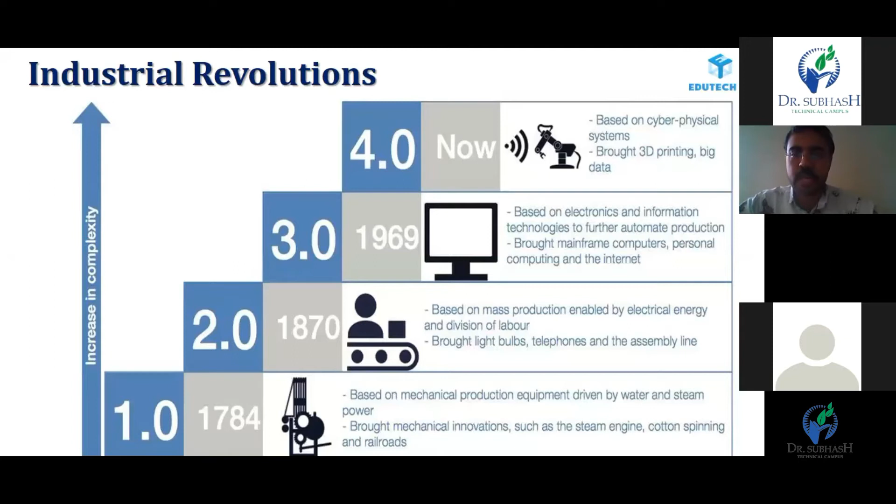So in the third revolution we faced these kinds of inventions, and currently we are in the fourth industrial revolution. It is basically the combination of earlier inventions, and the internet has lessened the distance between these manufacturing systems. Robotics, the internet of things, big data analysis, augmented reality, virtual reality, 3D printing, these kinds of cyber physical systems have grown up, and we are now in the fourth industrial revolution, known as Industry 4.0. So 3D printing is a technology we are using in Industry 4.0.

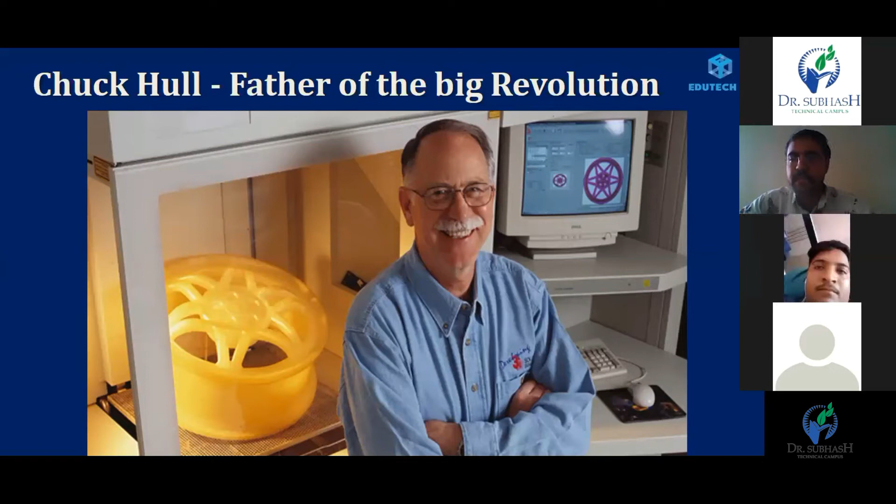This image is of the father of the revolution, Chuck Hull, who invented 3D printing for rapid prototyping in the 1980s. Initially he invented the stereolithography apparatus, which was based on the vat photopolymerization technique, and after that many different processes started to grow up. He patented it and established a company known as 3D Systems, which today is a very big company in the 3D printing sector.

There are 6 phases of 3D printing, starting from the 3D CAD model to the entire 3D printed object. First and foremost, we need software in which we can make our CAD model, and after making that CAD model, it has to be converted into a particular file format, known as the .stl file. In other terms, it is also known as the stereolithography or 3D printing file.

After making that file, your 3D printer is not able to understand what data the .stl file contains, so it has to be converted into a machine readable format, which we use to run CNC machines, that is the G-code file. So the .stl file needs to be converted into a G-code file. For that we require software known as slicing software.

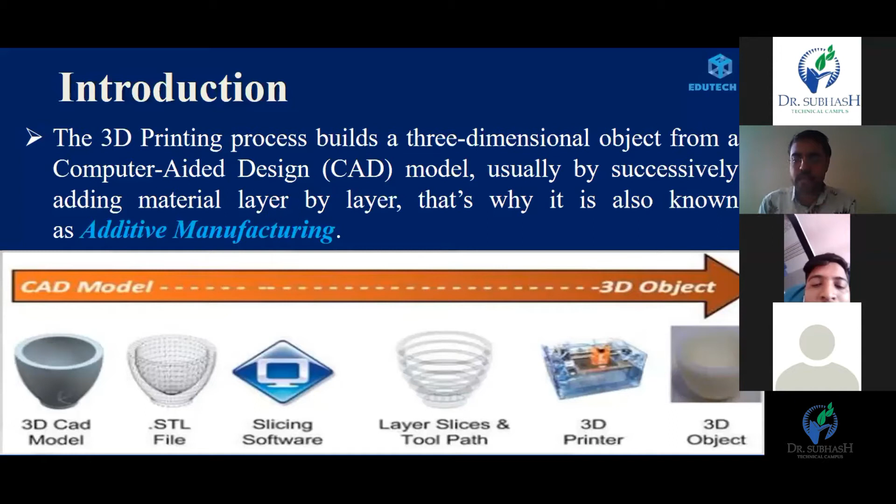After considering hardware, you have to acquire software knowledge for running a 3D printer, for modeling a 3D model, and for converting that 3D model into machine readable format, that is G-code. For the entire thing, you have to consider many kinds of software. So software makes up a very good proportion of the 3D printing ecosystem.

Next comes the material. Till now, we have developed more than 100 materials of different types. For example, thermoplastics, polymers, composites, metals, alloys, rubber, elastomers. Many kinds of materials are available which can be used with certain kinds of 3D printers. So we have enough material today to deal with 3D printing, and new materials are being introduced day by day as material science progresses.

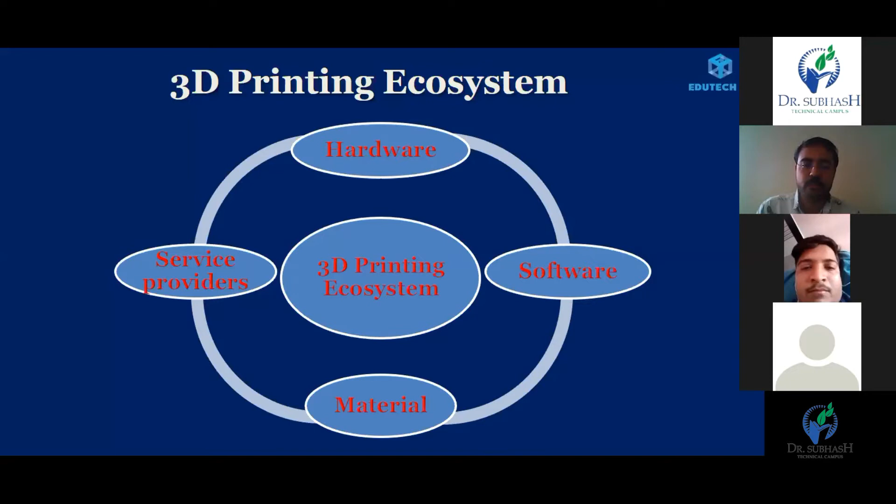And the fourth pillar of the 3D printing ecosystem is service providers, combining the three earlier stages, meaning those who deal with the hardware, software, and material, and provide services such as procurement of material, procurement of hardware, and development of software. These services are provided by the service providers, and they are taking 3D printing to the end users in the community. 3D printing educationalists and 3D printing teachers are also providing services in the 3D printing ecosystem.

Now, going into 3D printing, or you can say the additive manufacturing technologies, there are majorly 5 types of technologies available till now, starting from vat photopolymerization, which is the earliest technology ever developed. Chuck Hull developed this technology. For vat photopolymerization, you can consider the stereolithography apparatus.

Digital light processing is also there, which uses resin material and a photocurable light, meaning you can use UV light or a UV laser for curing a photopolymer material. We'll be going into it in the next slide in depth.

The second process is the material extrusion process, which is also known as fused filament fabrication, or more generally as fused deposition modeling. But fused deposition modeling is a trademark term used by Stratasys. So in general, you cannot use the fused deposition modeling name. Instead of that, you would use fused filament fabrication.

It's a material extrusion process, meaning you are extruding the material with the help of an extruder motor from the nozzle, from the hot end, and you are melting the plastic material. The material is thermoplastic, meaning according to temperature it melts and starts flowing out of the nozzle, and it will deposit on the platform bed and generate the shape according to the geometry provided by us. So that is material extrusion.

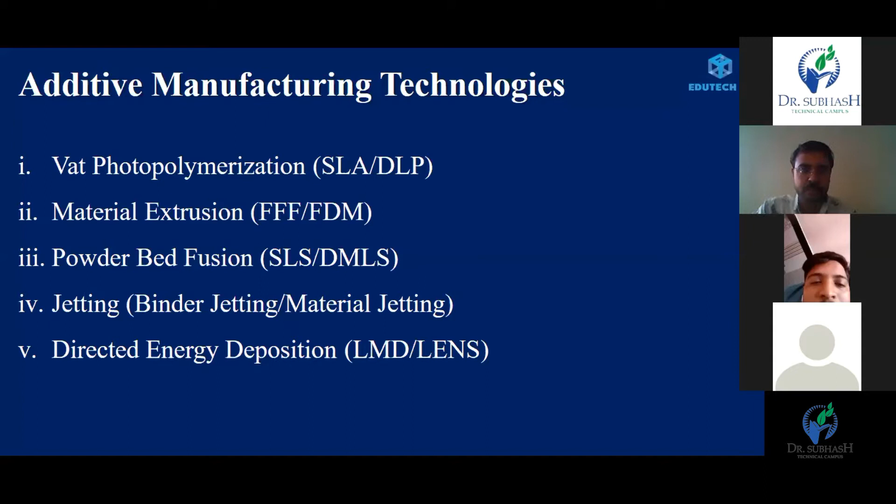Where your geometry is provided, you will be imparting the laser on the resin, and at a particular point your resin will get fused and start making the shape. Your platform will be upside down in this particular technology, and you will be getting the shape in an upside-down manner from the base to top. And after producing the whole object, you will be able to take out the material, and after post curing, the object is ready.

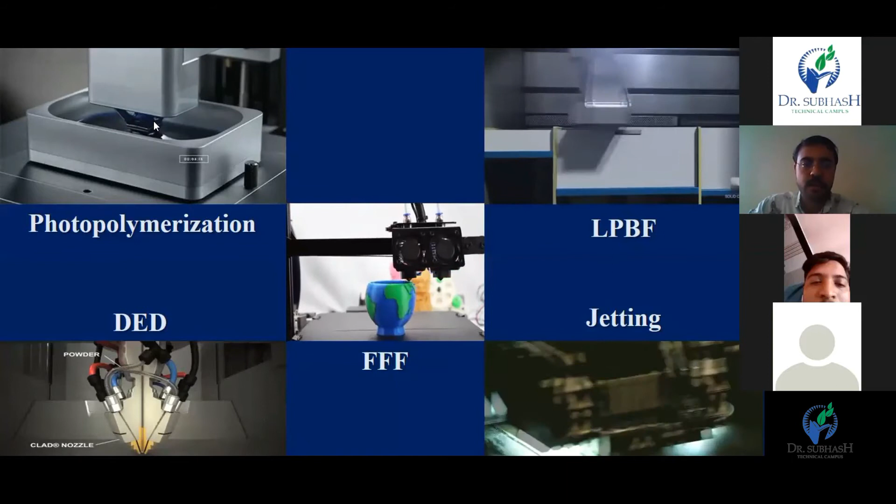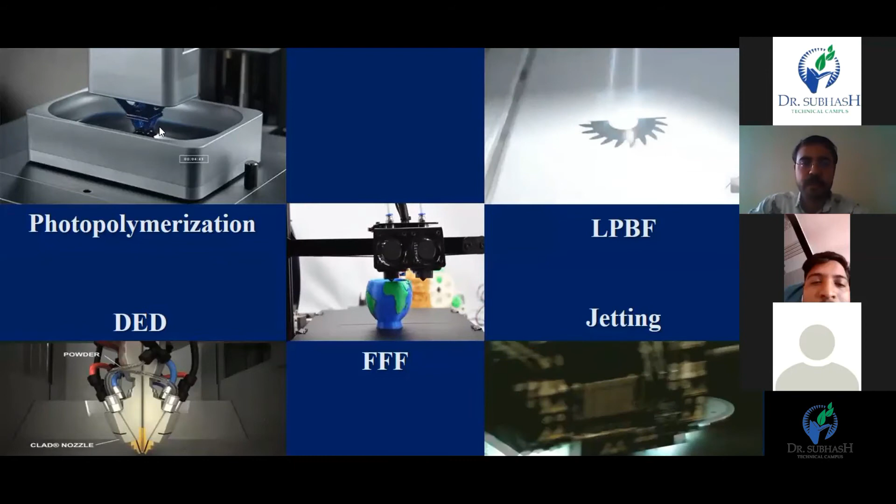Now, when to procure this kind of 3D printing system? When you require a certain kind of geometry and a certain kind of surface complexity, then you can opt for this kind of technology. It will give you a tremendous amount of accuracy in shape.

Another kind of technology is fused filament fabrication, or FDM, which is the material extrusion technology, in which you are extruding the material from the extruder, and here a hot end will be provided. The hot end will be able to melt the material, and material will come out of the nozzle and be imparted on the platform bed, as here the object of a small scale replica of Earth has been made. So as per your geometry, you will be able to impinge the material on the platform, and it will be fused over there, and you will be able to get the material from the plastic or thermoplastic.

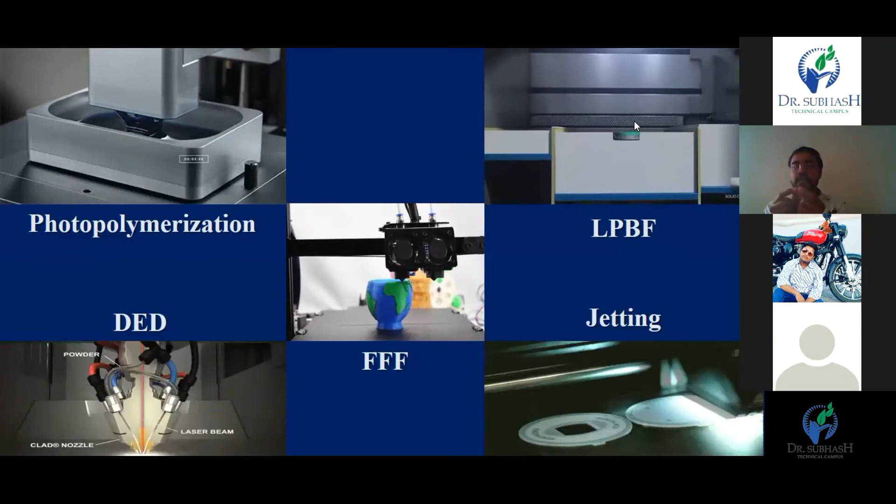The third process here is laser powder bed fusion, or powder bed fusion techniques, in which we are using laser power to sinter or melt. Here there are two processes. Some machines are able to sinter only, and some machines are able to melt the entire material. If we are dealing with plastic or polymer powder, then you are not going to melt that polymer powder. Instead, you only have to sinter that polymer powder, and it will get fused with some kind of binding mechanism, and your material will be generated.

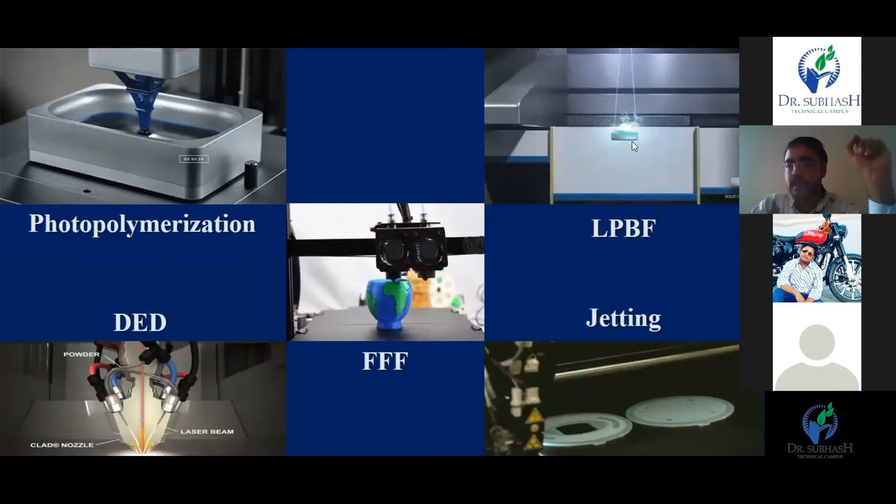If you are using metal powder, then in DMLS you are sintering the metal powder. You are not going to melt the metal powder, but if you are going for selective laser melting, then with the metal particles you would need more laser power, a more efficient, higher voltage laser, which will be able to melt the metal powder so it starts fusing together. Also, certain kinds of alloys are used in this laser powder bed technology.

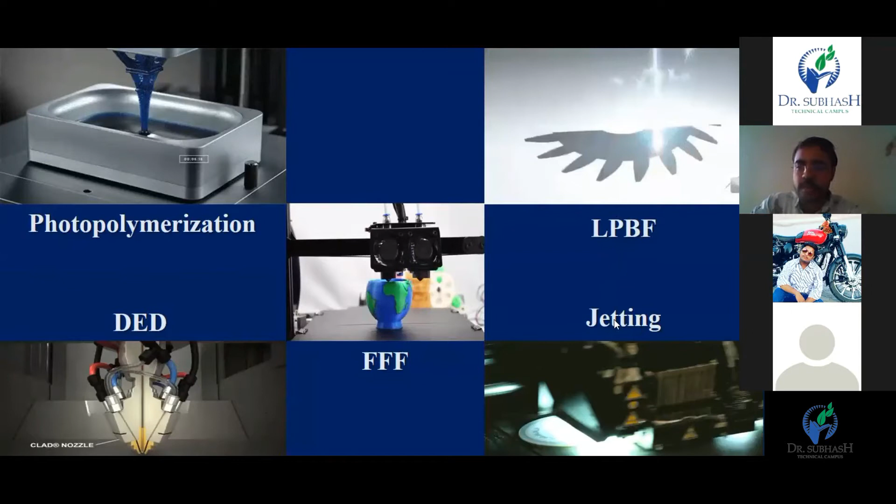Next comes the jetting technology, in which there are two processes: binder jetting and material jetting. It is similar to inkjet printing.

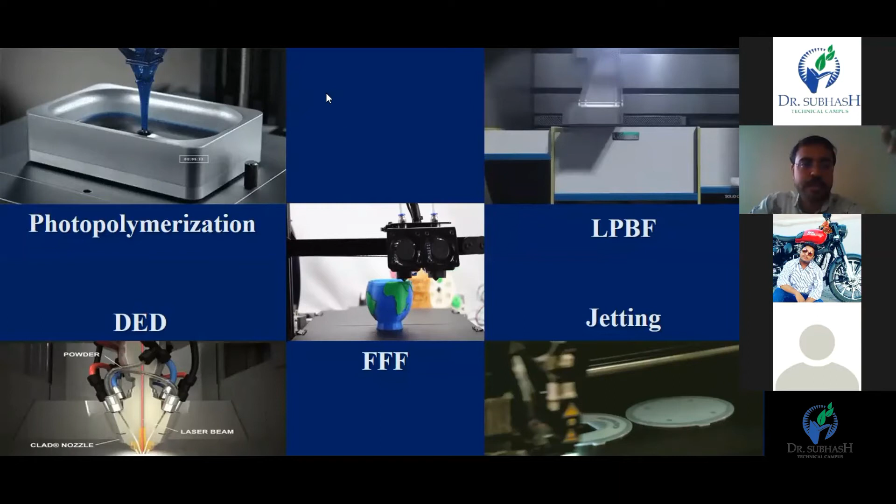I request anyone, there is background noise, please mute from your side. There is background noise from somewhere. Thank you.

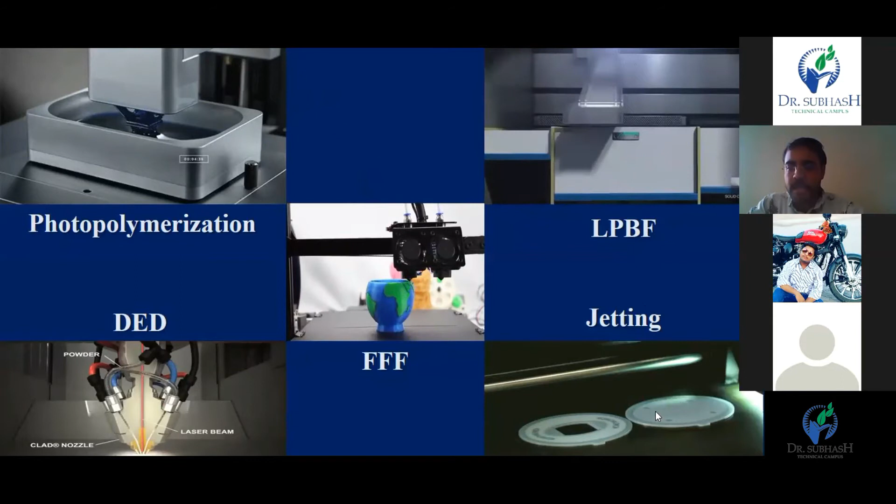In the jetting process, we have two kinds of process: binder jetting and material jetting. In binder jetting, we have a powder bed similar to laser powder bed fusion technology. Material jetting is similar to the stereolithography process. There will be a number of tiny nozzles. We will be able to impinge droplets from there, as is done in a 2D inkjet printer. In a 2D inkjet printer, we provide ink there. Instead, here in the jetting process, we are providing a metal powder or polymer powder, and it will be impinged over the build platform.

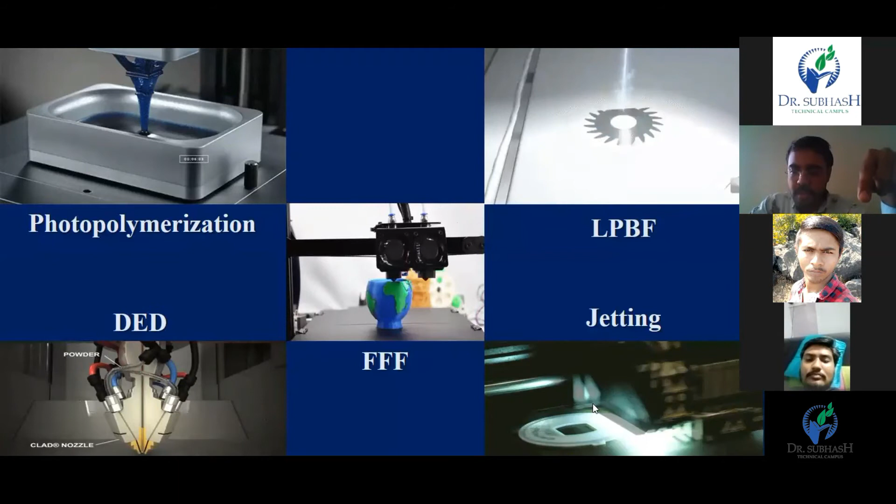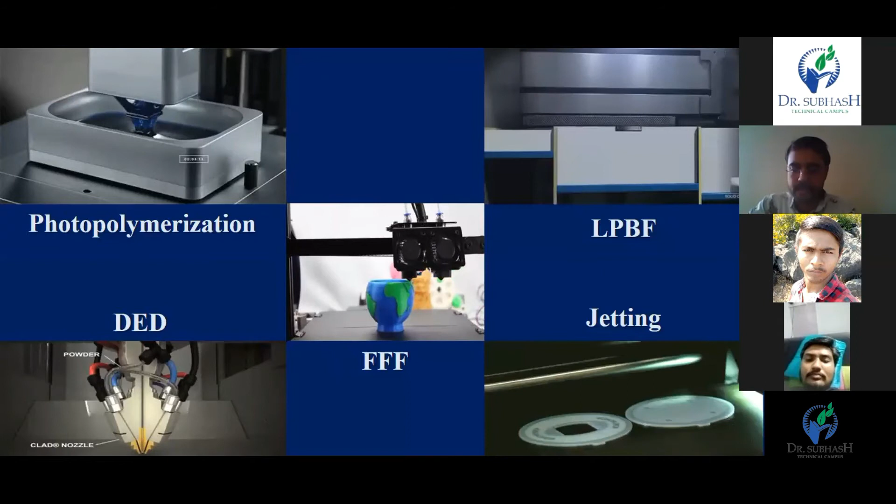A laser or UV light will be on the printhead, which will be able to cure the material deposited on the bed, and it will start getting fused and generate the shape. Certain color jet or polyjet processes can make things in monochromatic color or multicolor. You might have seen figurines or small scale replicas of humans, as well as statues. They are all made with polyjet and color jet processes.

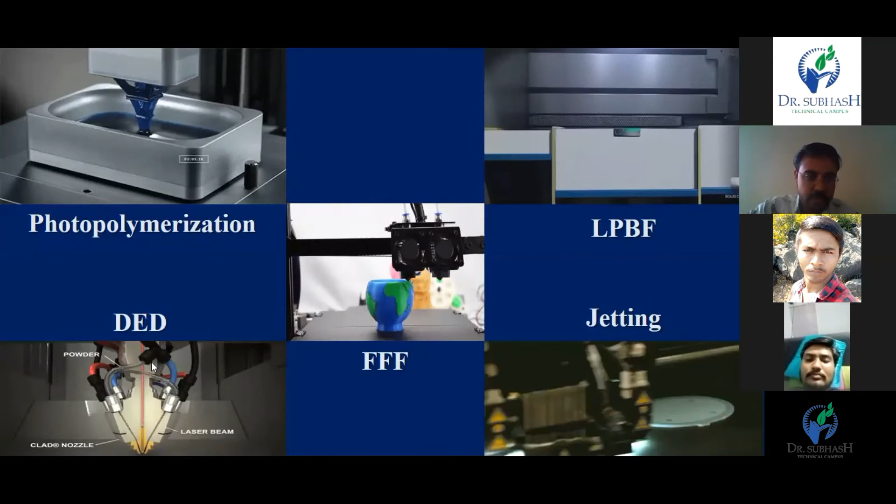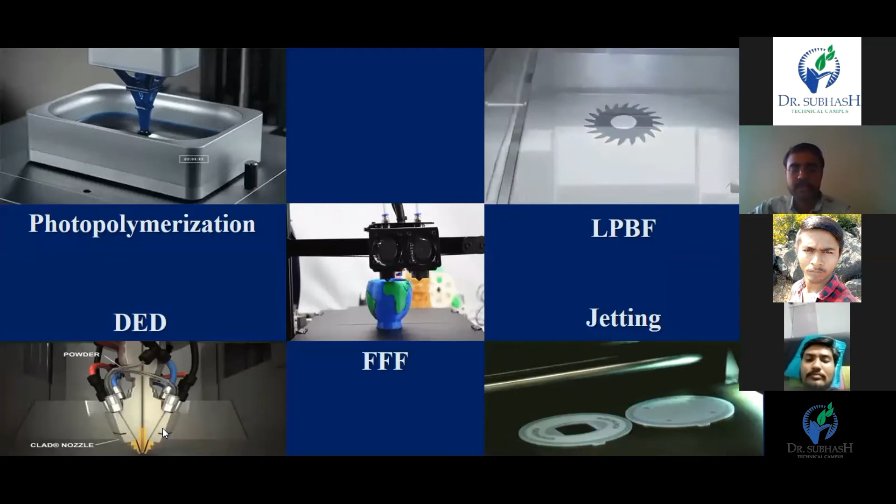The last process is directed energy deposition, also known as laser metal deposition, and the LENS process. LENS is a trademarked process of a company, in which there are a number of coaxial nozzles. You can see this in the figure. The laser will be imparted from here, and material will come out of here, and it will start melting on the build plate at the same time, and your 3D print will start in the same manner. So these are the processes of 3D printing, and various new inventions are being made in the same field.

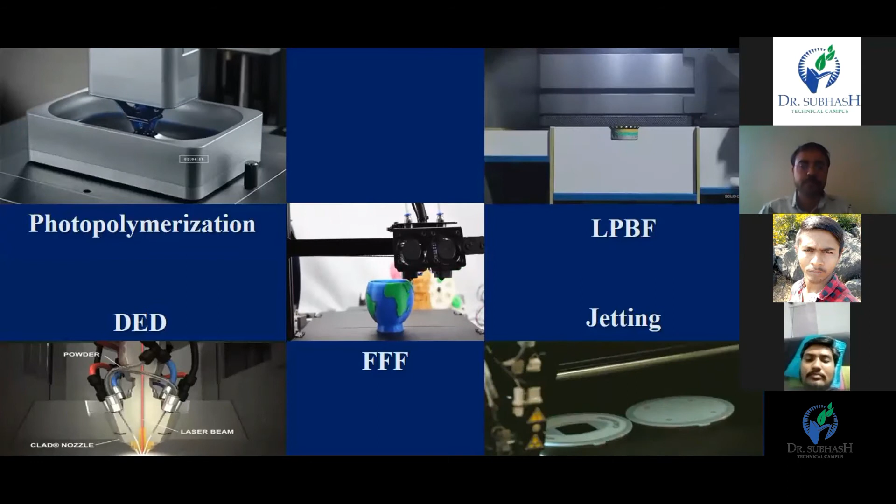So with respect to our topic, 3D printing is a game changer in the manufacturing scenario. How is it able to make this kind of big change? Let us start discussing that. Here I have shown a comparison of traditional versus additive supply chains. In traditional manufacturing, we need to acquire land. After procurement of land, we need to build a building where we can start our manufacturing. We have to provide material resources. We will have to make depositories like garages or inventories, and manufacturing will be done at one place only, assembled there, and distributed to the entire region.

The region might have covered up to 100 kilometers or 1000 kilometers or 2000 kilometers, but the manufacturing will be done at one place only, and we'll have to transfer the material to the end user who might be very far away from the manufacturing unit.

But in additive manufacturing, this is not the case. All that you would need is a system which is compatible with 3D printing. Your computer is there, you make the 3D model in your computer, and with the help of the World Wide Web, the internet, you will be distributing the file which has to be 3D printed to the end user. So a new concept named distributed manufacturing you can implement in additive manufacturing.

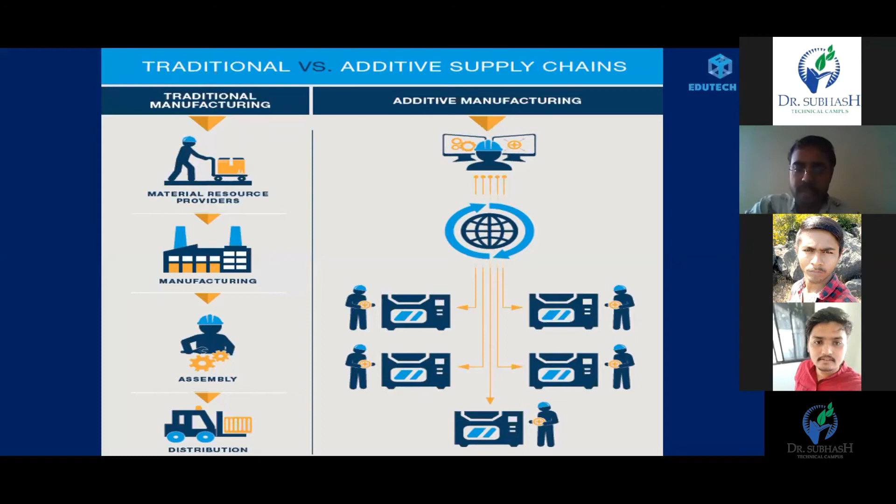If you want more than 10,000 or 20,000 pieces to be produced, then you can opt for injection molding or certain conventional processes. Initially you would need to experiment with the designs, so additive manufacturing has the capability for conducting a number of iterations and design experiments, and after the final proof of concept, you will opt for conventional manufacturing like injection molding. So it is volume dependent. If your requirement is low, opt for additive manufacturing. If your requirement is high, opt for conventional manufacturing.

And I would like to mention one thing also. Additive manufacturing is not going to replace the entire traditional manufacturing. It is a subsidiary, or an option, we can say, to the limitations of conventional manufacturing. It is not going to change over the entire manufacturing scenario.

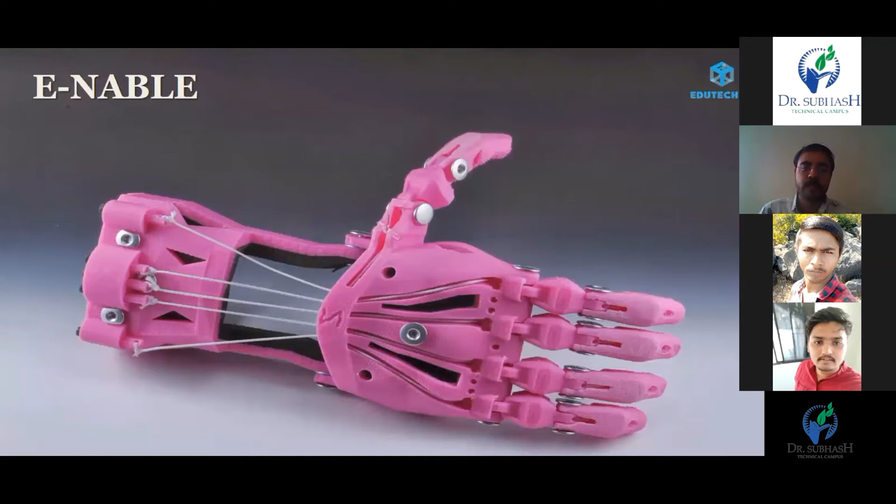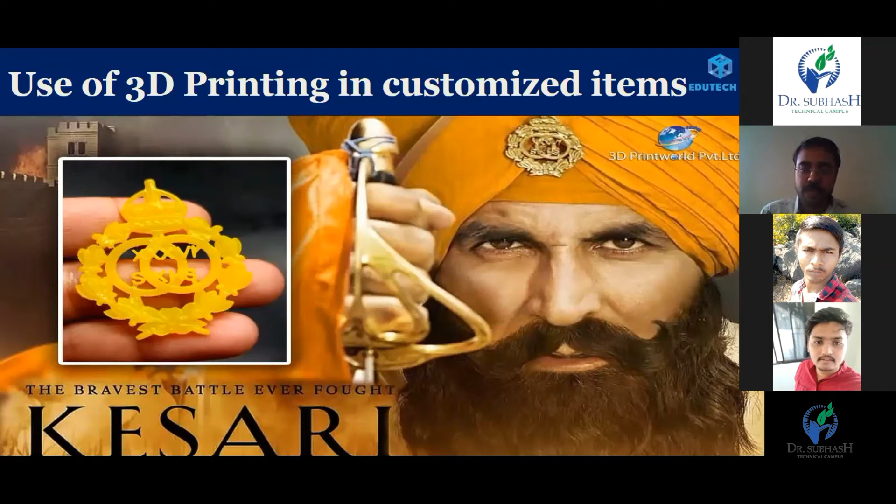Two weeks ago, Dr. Subhash himself organized a webinar with Mr. Varmora discussing electric vehicle opportunities, a growing market. Today, Dr. Subhash has organized a 3D printing seminar. So what if we combine both concepts? This is the best example of 3D printing and electric vehicles.

This is the car developed by the Italian startup XEV, named LSEV Yoyo - Low Speed Electric Vehicle. It is claimed to be the world's first 3D printed electric car, entirely 3D printed, which can run at 70 kilometers per hour and go for 150 kilometers. The producer of this XEV car has claimed that they reduced the car components from 2000 to 57 due to 3D printing.

So this is the power of mass customization, you can say. This is the kind of customization for an entire mass - those who are requiring a budget car and a novel car can have it with the help of 3D printing.

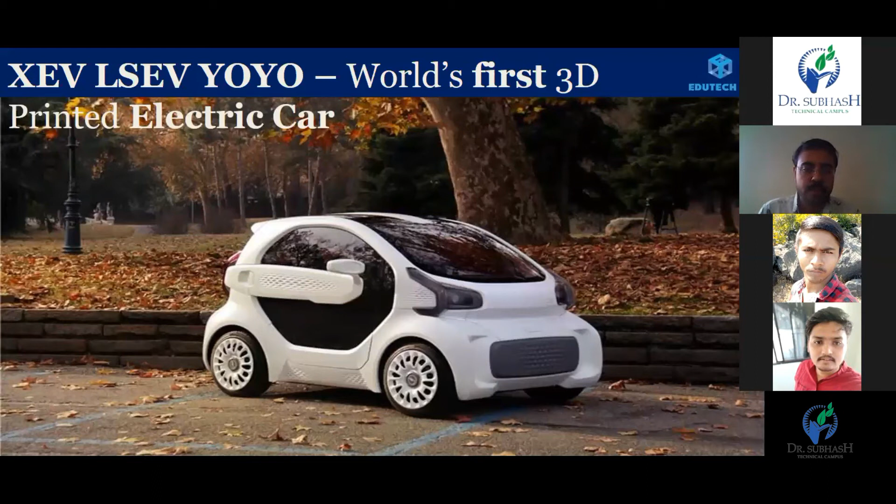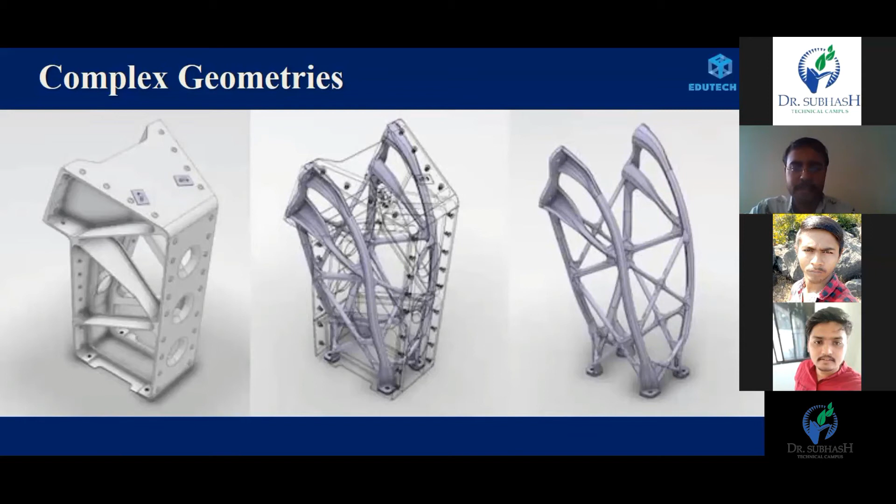Many people say that this technology might create fewer jobs, or take away jobs from employees. So is it the case? Let us discuss this, let us throw some light on this.

Now, the technology itself is a growing technology, and more and more areas are being introduced into 3D printing. For that, we would need more expertise, more intellectual manpower to develop this technology, because it has itself started making new areas of jobs - for example, 3D CAD designers, product designers. You can opt for this kind of career as per the ability, capability, and skill you have.

You can make a career in bioengineering and scientific modeling as well. You can make a career in material research, because as we have discussed, we are introducing new materials to 3D printing. So there is a huge requirement in the research field of materials.

We would require specialists, lawyers, and legal professionals for this technology, because this is a new field for lawyers, and new laws have been formulated to tackle this technology. We would require architects and engineers with 3D printing specialisms, hardware and software developers, and entrepreneurs developing and bringing new 3D products and applications to market. And we require 3D printing and design teachers and trainers to disseminate this technology to end users.

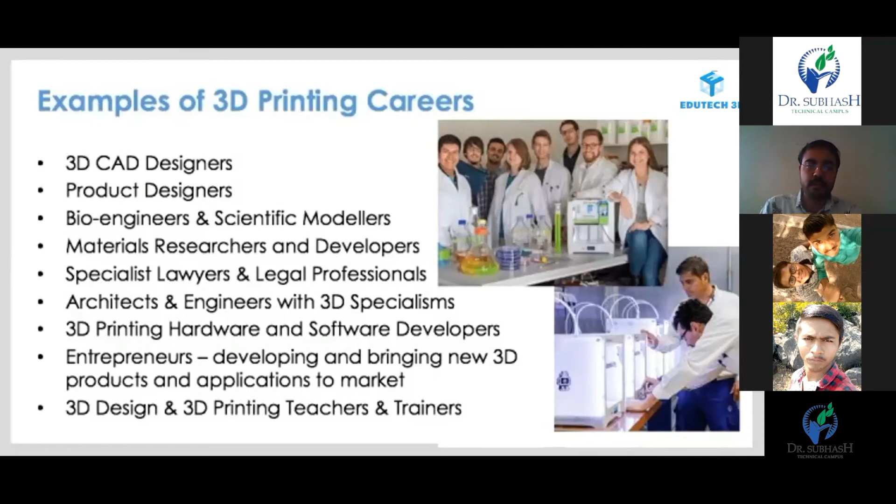So these are the new age jobs which have been created with the help of 3D printing. So it is not the case that it will take up jobs from professionals.

Another advantage of using 3D printing technology with respect to subtractive manufacturing is here. In subtractive manufacturing, we would require a bigger block of material, and on that we do processes like milling, facing, turning, etc., removing material from it to make a 3D object, and we experience a lot of waste.

But instead, in 3D printing, we require less material to produce because we are impinging material layer by layer, so you require a smaller amount of material for making a 3D printed object, and you face less waste with the help of this technology.

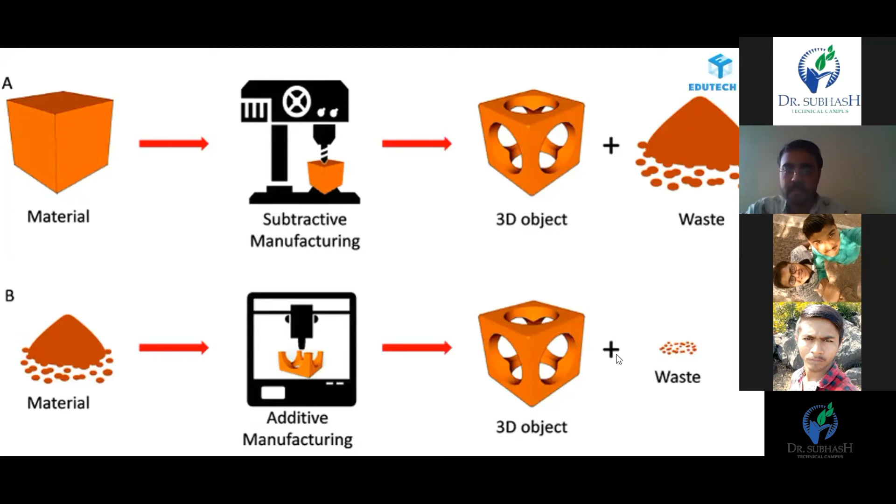In similar ways, you don't need this kind of inventory or goods collection system for raw material or finished product, because as and when the requirement comes, you would have the material, start 3D printing, and dispatch the material as per requirement. So all this can be eliminated by implementing 3D printing into conventional manufacturing.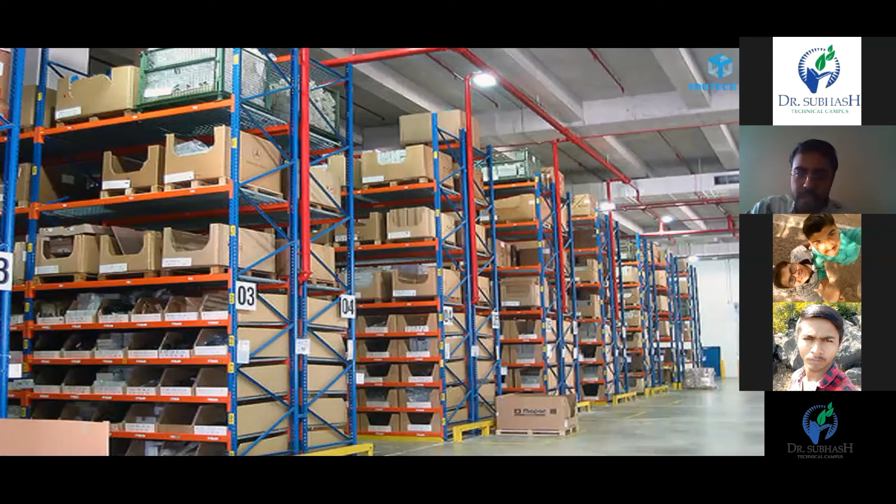In new product development, we are using 3D printing heavily. More than 50% of new product development companies have moved to 3D printing because it has helped them reduce costs by up to 80 to 90%, since they require a number of iterations for idea generation in product making. That's why they have opted for 3D printing.

A good example of this is the facial visor. Before going into the market, we initially experimented with 3D printing. We made 3D printed facial visors because we had the design open sourced, and we converted it into a 3D object using a 3D CAD file, and printed it. After succeeding with this product, we moved to injection molding to produce it in mass quantities, meaning 10,000 to 20,000 pieces at a time. So this is the best example of new product development.

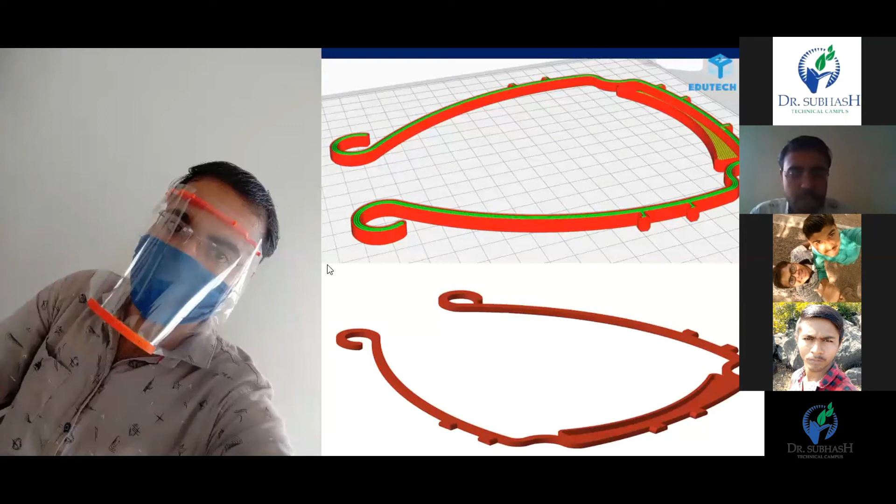So let us discuss mass manufacturing with 3D printing.

You might have heard about hearing aids. As per the study, almost 95% of hearing aids or hearing implants across the world are made with the help of 3D printing only. The technologies used for producing hearing aids are stereolithography and DLP. This resin-based technology is able to produce hearing aids in mass numbers as per customer needs, because hearing aid companies scan the ear of the customer and produce the hearing aids as per requirement. A well-known company in this field, Starkey, has claimed to make 98% of its hearing aids using SLA, 3D printing only.

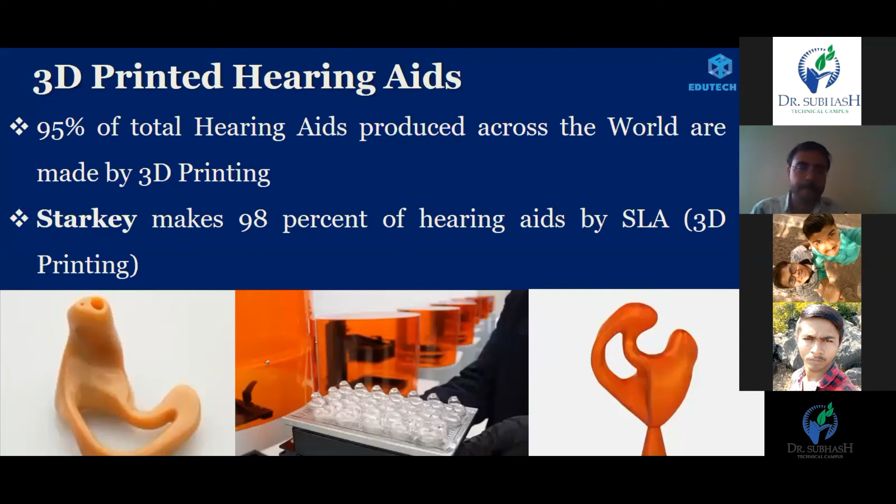This is also a very familiar case study, which you might all have heard about. This is an invention made two months back by the Italian startup Isinnova. At the Brescia plant, there was an urgent need for ventilator valves due to the increase in coronavirus patients in the hospital, and the local conventional manufacturer wasn't able to cope with the demand. So Isinnova collaborated with local manufacturing unit Lonati, reverse engineered the ventilator valves, and started making them using SLS and FDM 3D printers. Within 24 hours, they were able to make more than 100 pieces of the valves and gave them to the hospitals.

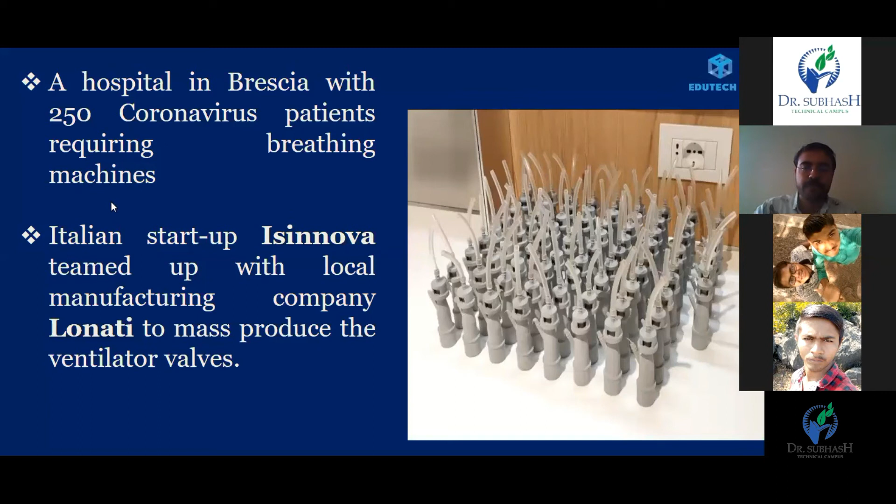Automobile manufacturer Volkswagen has over 125 industrial printers with them. They collaborated with more than 25 other companies and started making equipment for the medical community with the help of 3D printing.

Another tech giant, HP, is employing 3D printing expertise by turning its R&D centers in Spain and the US into factories for manufacturing urgent personal protective equipment.

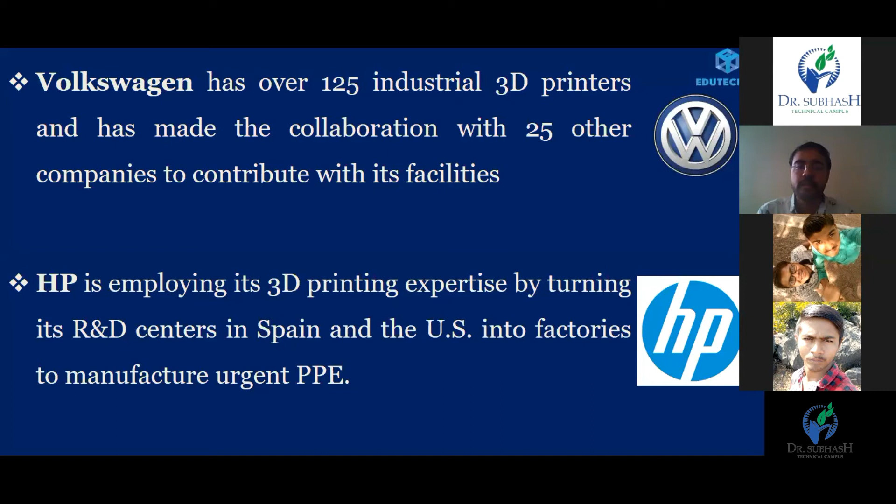Some bigger companies have dedicated their entire firm for the production of personal protective equipment in the time of COVID-19. For example, a Barcelona-based company, BCN3D, has given up its print farm of 63 machines, as you can see in this figure. They have dedicated their entire 3D print farm for the production of personal protective equipment, 3D printed masks, to combat COVID-19 and produce medical equipment for the medical community.

In the same manner, an unnamed company in China has dedicated its 200 Flashforge 3D printer farm for production of 3D printed goggles. They are producing 2000 pieces per day and distributing them across China and outside China.

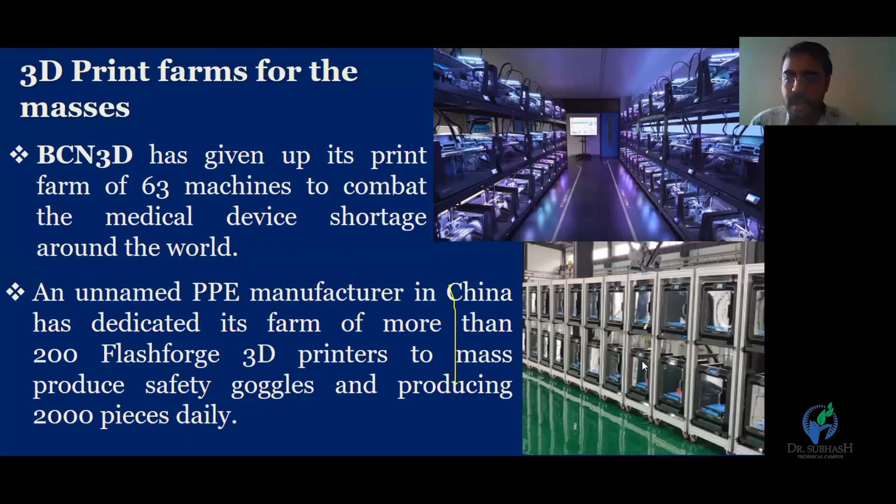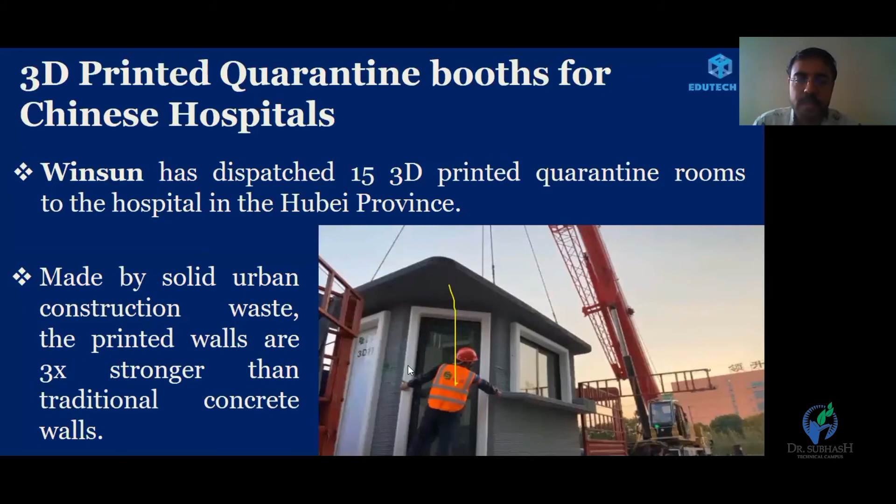Next, as you can see in this figure, China has developed an entire 3D printed cabin, you can say a 3D printed quarantine room. You might have heard that China built a hospital in 10 days. In that construction, they introduced 3D printing. A company named Winsun has dispatched 15 3D printed quarantine rooms to hospitals in Hubei province, from which the coronavirus started spreading. They made this whole structure from urban construction waste, and they claim these printed walls are 3 times stronger than traditional concrete walls.

Now we are facing some challenges in 3D printing. For example, the cost of the equipment is very high. FDM 3D printers come at a reasonable price, but metal 3D printers cost lakhs of rupees or even crores. So that cost has to be brought down for normal people and normal applications.

Second is the material available for the industry. We currently have more than 100 materials, but we would require more types of material for each and every industry to be operated.

Third is post processing, because in some cases, for example the powder bed fusion technique, we have to vacuum out all the powder and post process the printed object. In fused deposition modeling, we need to remove the support structures and all that. So post processing is required.

Next is the manufacturing cost. As the material is costlier and the printer is costlier, the manufacturing cost ends up higher, so it has to be lowered.

Next is expertise, or a lot of expertise, because we need qualified, trained manpower to operate the 3D printers and deal with the software and all that. As mentioned earlier in the employment slide, we need certain skills for dealing in the 3D printing industry. If we don't have that skill, we need to acquire it, or otherwise we will be thrown out of the industry.

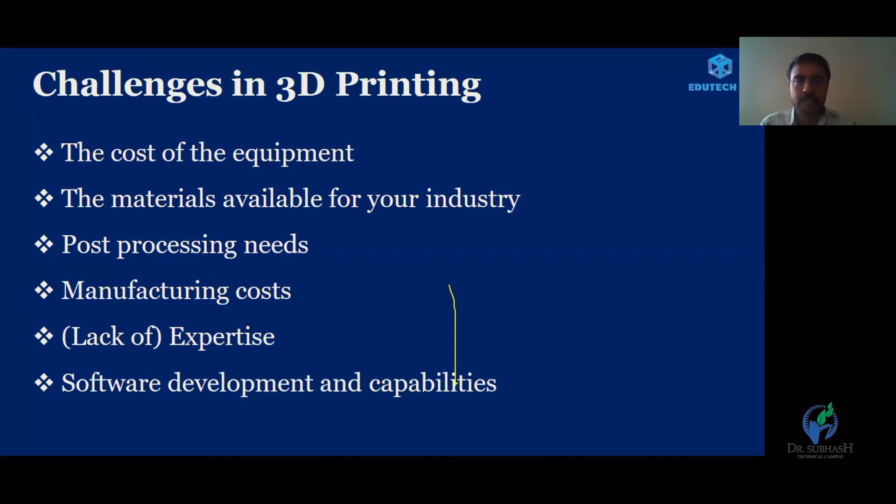And last is software development and capabilities. To operate the 3D printer, to make the 3D model, and to convert it into machine readable format, we are using a lot of software that needs to be upgraded. It needs to be developed more and more with a great user interface. So this is also a challenge, to make this kind of software.

We can consider it a scope for evolvement. We can evolve, we can develop more and more new technology to compete with other countries, and develop more economical, feasible, and easily available 3D printing technologies. So according to me, the full potential of 3D printing is yet to be seen in India, and there is a huge scope in the development of this sector and new products.

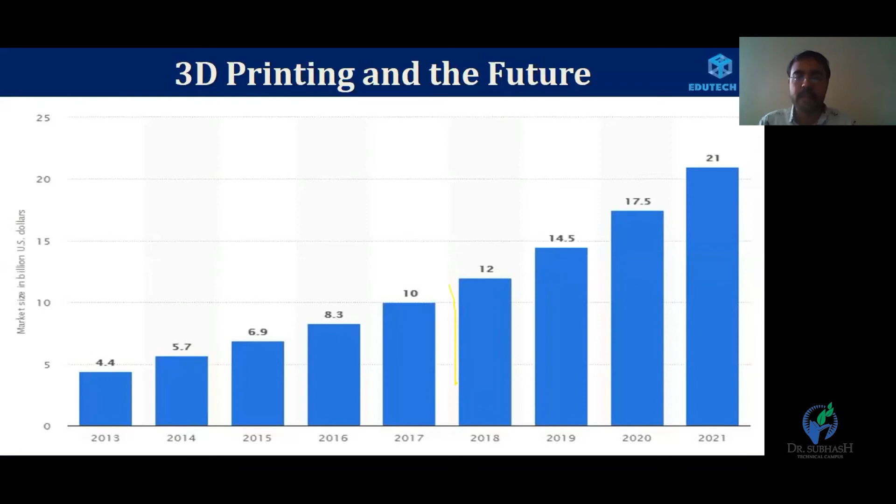So it is best to invest our time and our money in this technology for the development, for the dissemination. And if not today, then tomorrow we'll have to adopt this technology. So why not today? So let's start getting more and more insights in 3D printing and develop in this sector.

The last topic I would like to share with you is the future technology known as 4D printing. It is 3D printing only, but a new parameter has to be considered in this, so that makes the fourth dimension. You can say an external stimulus you have to provide on the 3D printed object, so that it can convert into the required shape for any kind of operation.

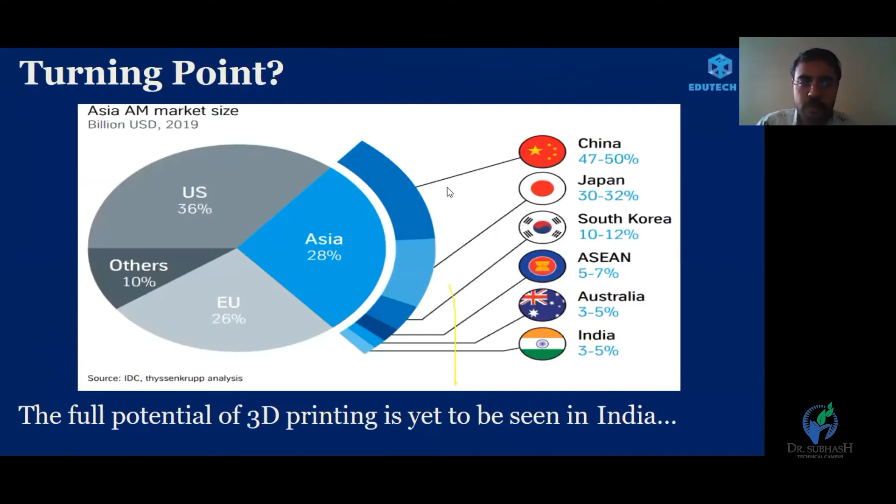Okay, Mr. Raj, one more question from the chat box. From the strength point of view, for the same material, which process is better, the conventional process or 3D printing? For what, sir? For the strength point of view. Okay, for strength, for the same material. Okay, yes, got it.

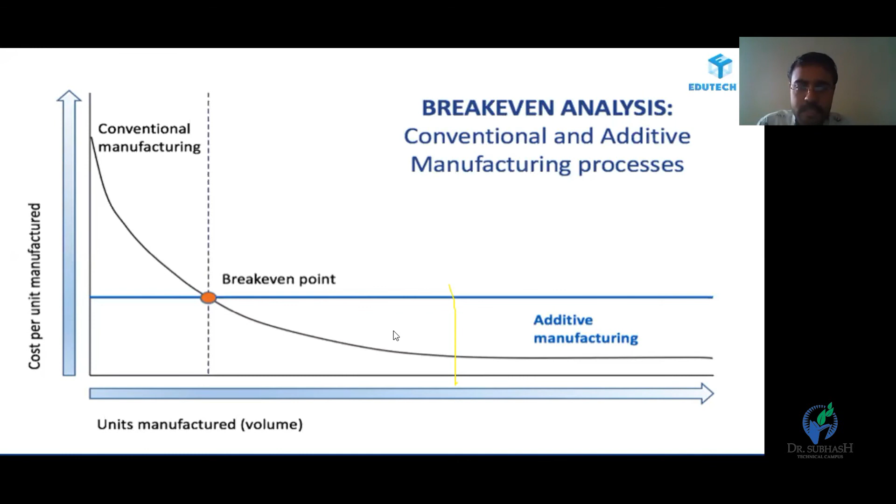Yes, I have discussed a case study here about airplane usage. Now, what if 3D printing did not have the cost, did not have the strength compared to traditional manufacturing? They wouldn't go for it. Well, that is the final point. It means you are getting the cost and the strength as much as you can get in traditional manufacturing. There is no difference between them. The material used is the same. In conventional manufacturing, you are using the blank. Instead, in rapid prototyping, in 3D printing, you are using the metal powder of the same material. So there will not be any cost or strength difference between these two.

Okay, and one more question is there. Which software is used in 3D printing? Sir, as I mentioned, there is one kind of software known as modeling software for modeling 3D objects, and another kind known as slicing software to convert the .stl file to a machine-readable file, that is G-code, right? For example, if you have heard about SketchUp, AutoCAD, CATIA, ProE, SolidWorks-like software, they are used in modeling the 3D models, and software like Cura and Simplify3D is used in making the G-code files from the .stl file.

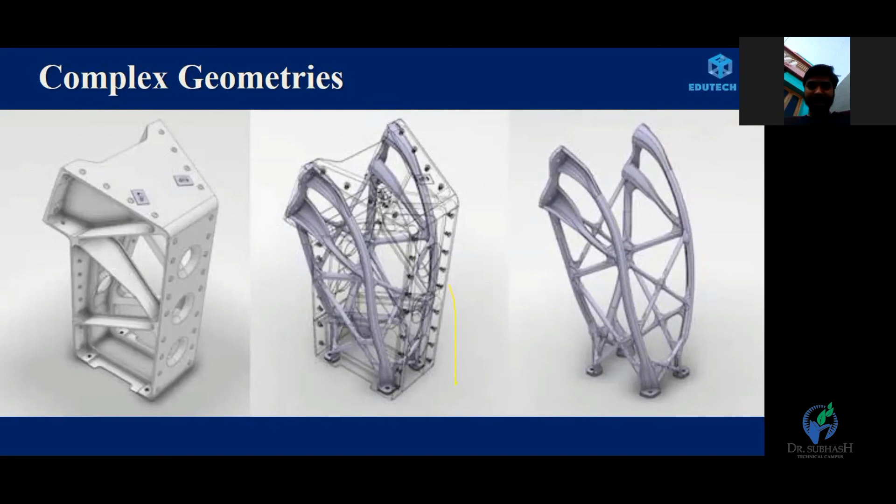Hello, Raj sir. Yes, sir. What about environmental and health problems? Environmental and health problems, sir. It is, I can say, material dependent. For example, in material extrusion, if you are using PLA material, then it is not harmful to the environment or to human beings. But if you are using ABS, which is a petroleum-based product, it has to be made in a separate chamber, and there should be a well-ventilated room, because it harms the human body.